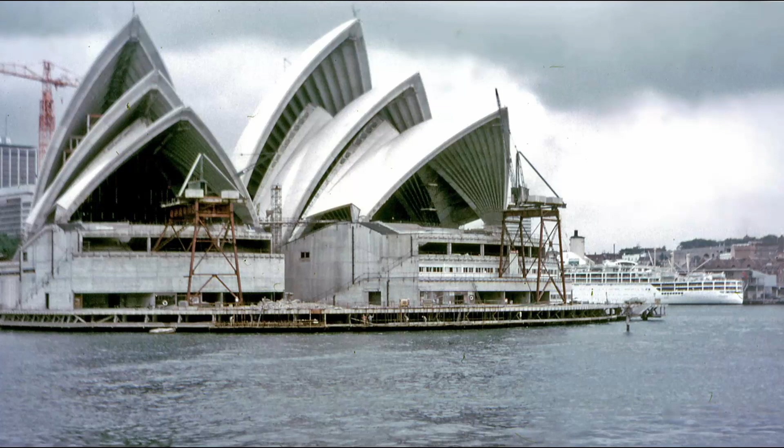In this series of videos, I'll be walking you through the entire process for completing a development in this state, from concept stage to completion, and clearing up some of the confusion that can seep in along the way. I've been in this job for a few years now, and there are a few things you should understand up front when you want to build something in this state.

Whether it's a house, a shed, or a pool, the first is cost. What a lot of people don't realise is there are actually quite large sunk costs in building before you even think about getting excavators in. Depending on if you're building in a new subdivision or not, you might have to pay for things like geotech reports, site surveys, flora and fauna reports, heritage reports, and bushfire assessments. The reason I mention new subdivisions is because these reports have typically already been done for the whole area, so you might be able to piggyback off those.

The second is when you see properties advertised by real estate agents as dual occupancy potential or room to add a granny flat, you'll almost always notice the letters STCA right after it. That stands for subject to council approval, which essentially means the real estate agents could be just lying through their teeth and they can get away with it because they're not actually promising you that it will work. Basically, if a real estate agent tells you about possible development options on a site, take it with a huge grain of salt because they probably just want the sale.

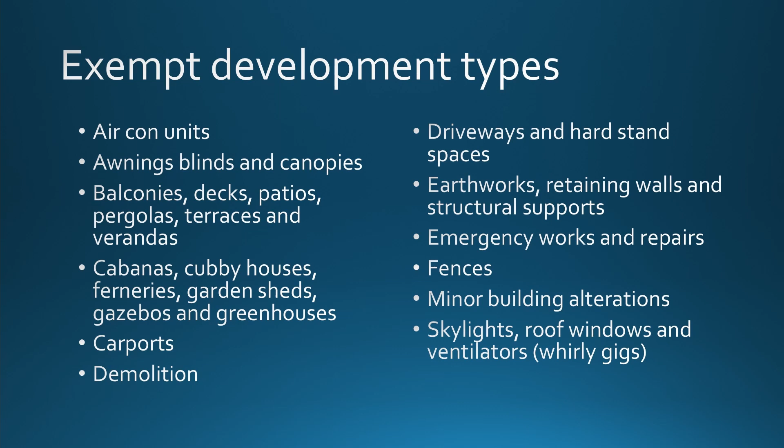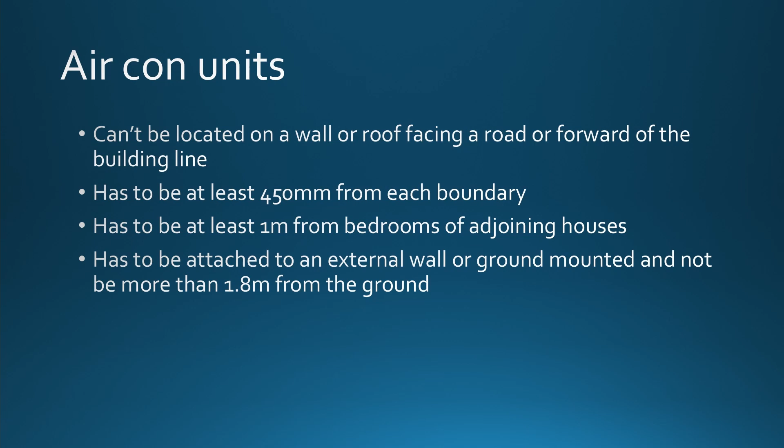Okay, so let's start with aircon units. Basically with these, you can't build them forward of your front wall or facing the main road. They have to be at least 450mm off each fence, and they're supposed to be a metre from bedrooms in adjoining houses. I've never seen that one really checked before, but it is something that's in the requirements.

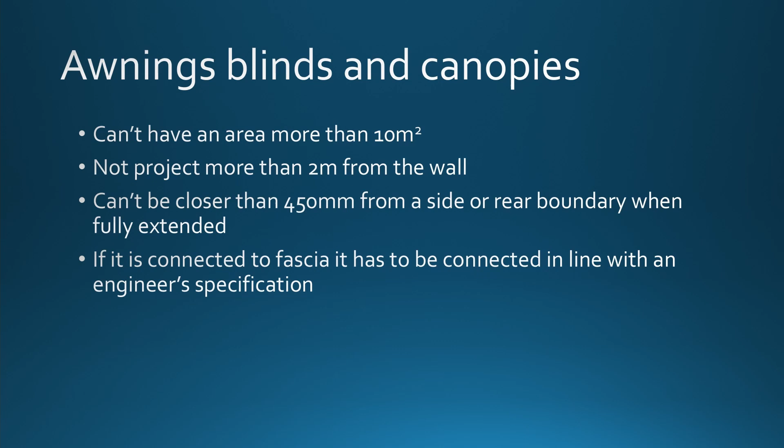For awnings, blinds, and canopies, they can't have an area more than 10 square metres, can't be more than 2 metres off the wall, can't be closer than 450mm from a side or rear boundary, and if you connect it to the fascia of the building, it has to be engineered. You'll find with most of the things in this that they say it can't be closer than either 900mm or 450mm. That's really standard for most development.

So balconies, decks, patios, pergolas, terraces, and verandas. These are going to get asked about a lot, and you can't have more than one being 25 metres squared, and the total of all of these types of things can't be more than the numbers right there.

And you also have to be careful when you're building these so that there aren't any walls around that are higher than 1.4 metres, because if there are, then it's classified as a room and not as a balcony or a deck.

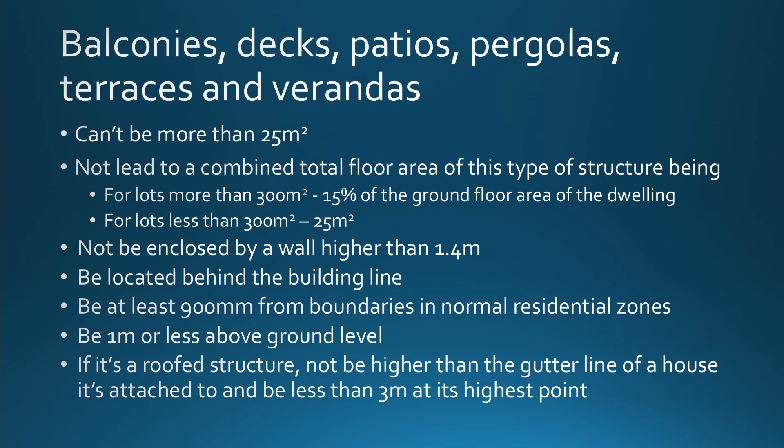The only other real things to keep in mind with this is that they can't be more than a metre above ground level, which is pretty important. That gets checked. And it also can't be more than 3 metres, or if it's attached to the side of your house, can't be higher than the gutter line of the house.

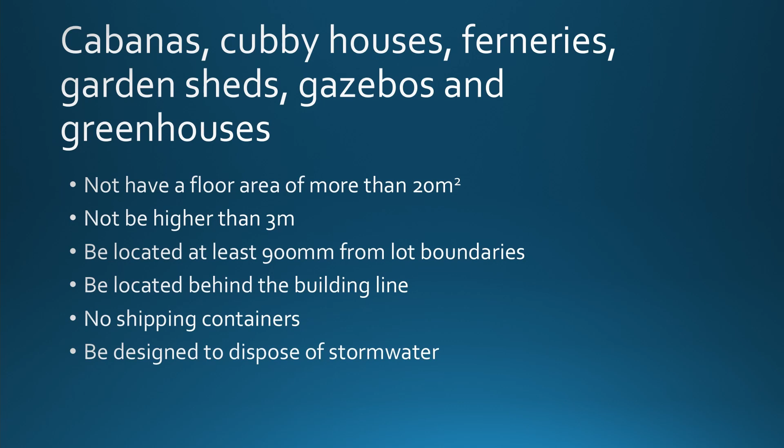So for cabanas, cubby houses, ferneries, garden sheds, gazebos, and greenhouses, can't have an area of more than 20 square metres, can't be more than 3 metres high, have to be at least 900mm from the boundaries, and really importantly, they can't be shipping containers. There's a lot of people who try and use the small shipping containers as garden sheds, and you're just not allowed to do that.

For carports, they can't have a floor area more than 25 square metres if the lot area is more than 300 square metres. If it's less than 300 square metres, you're only allowed 20 square metres.

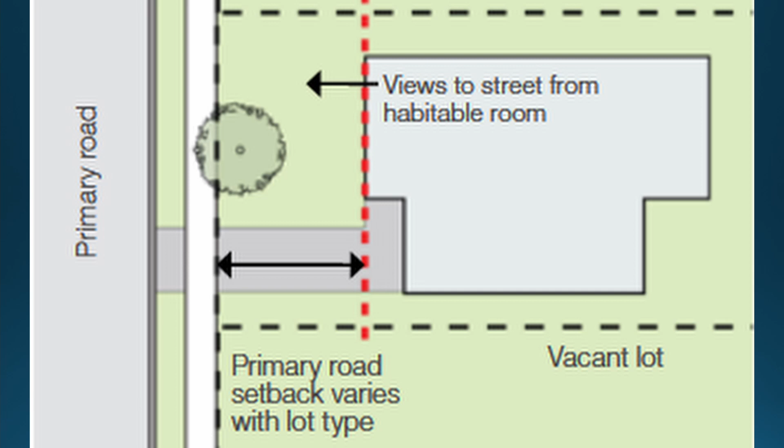You've got the same rule about the height, and if it's attached to the house, it has to be lower than the gutter line. It has to be a meter behind the building line. The building line is defined, for this context, as the line where the front of your house is - so the front wall of the first room of your house, that's where the building line is.

Demolition - I get asked about this one quite a bit. For demolition and exempt development, basically it allows you to demolish anything that you would be able to have approved by exempt development. So for any of the things we're talking about here, you're allowed to take them down without approval as well.

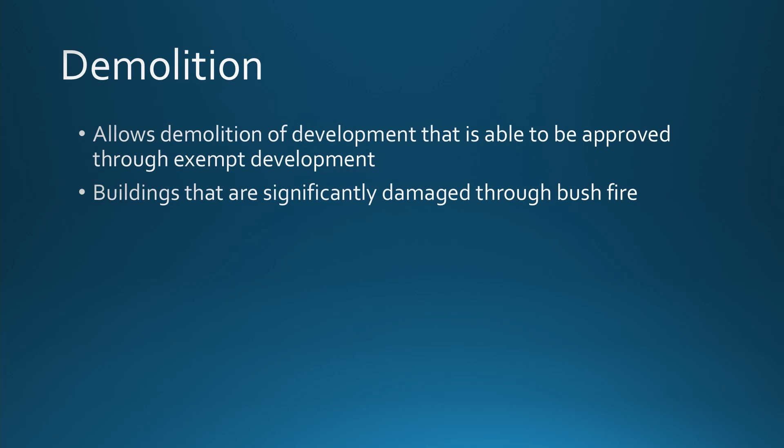Another big one is driveways and hardstand spaces. This one is a bit more in depth because there are quite a few rules around it. It has to be designed so the stormwater runoff goes into the normal stormwater system and doesn't just flow into your neighbour's yard. It has to be built in accordance with the Australian standard. And if it's ancillary to a dwelling, meaning attached to a house, it can't have cut or fill more than 600mm.

And if it's not attached to a house, it can't have cut or fill more than a meter. For driveways, you can't have them any wider than the hardstand space, carport, or garage that it's connected to. And if you're putting in a new crossover over the verge and onto the road, you have to get approval from council before you do that.

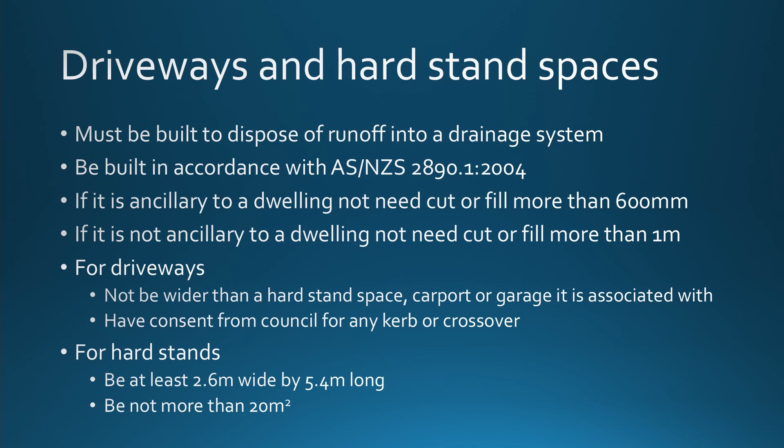For hardstand spaces, they have to be a minimum of 2.6 wide and 5.4 meters long, and not more than 20 square meters. And if it's attached to a house, it has to be at least 1 meter behind the building line, and at least 900mm from each side or rear boundary.

Now this area part is really important. For all of your driveways, hardstand spaces, pathways, and paved areas - so all concreted or paved areas - can't be more than 15% of the lot area, or 150 square meters, whichever's less. You'll have to calculate that out for your own yard and lot, then work out which one of those is less, and that's the maximum you're allowed.

There's still some landscaping requirements. In your front yard, if the lot is less than 18 meters wide, you have to have at least a quarter of that area in front of your building line landscaped. And if it's more than 18 meters, you have to have at least half.

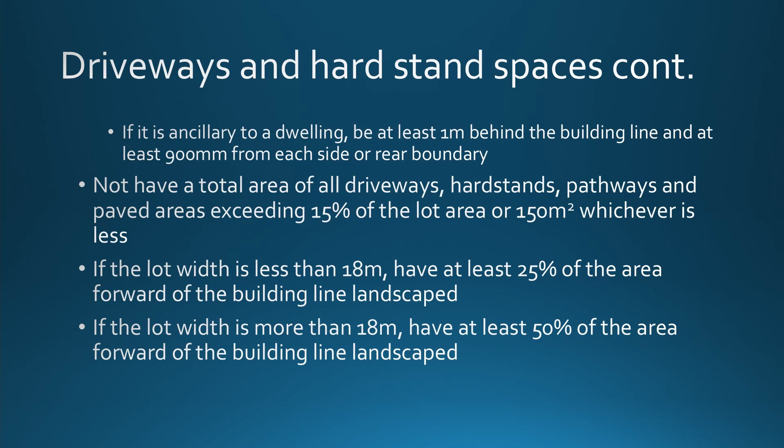Now for earthworks, retaining walls, and structural supports, you can't have cut or fill more than 600mm. It has to be at least a meter from each boundary, and at least 40 meters from a natural watercourse. So if you've got a river nearby, or you're on a larger block with a canal or something running through it, you potentially won't be able to do it as exempt development, and you'd have to get approval.

You can't have any of your earthworks or retaining walls redirect surface water flow. So if you had overland flow paths already put in when your house was built, you can't alter that by putting something like this in. If you are going to fill more than 150mm deep, it can't be more than 20% of the lot area - you can't just completely re-level your whole block, it can only be 20%.

For retaining walls, they can't be more than 600mm. They have to be separated from other retaining walls and structural supports by at least 2 meters. It has to be at least a metre from easements, sewers, and water mains, which you can check by going onto the Sydney Water Building Plan Approval website and doing a search. It'll cost you a few dollars, but you should do one anyway when you're going to build something. I'll go over that in more detail in a later video.

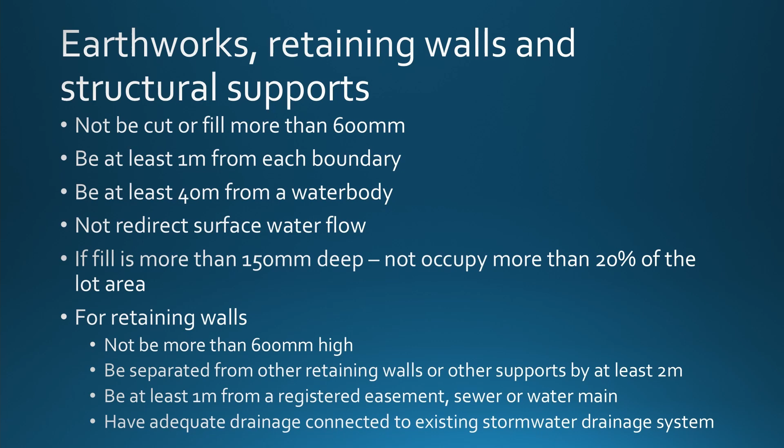Now, emergency works and repairs - this one is really, really misunderstood. A lot of people think that if something just starts falling down on their block, they're allowed to rebuild it, take it down, or do something else. It's actually not quite true. You can actually only do emergency works where the government has made a declaration that there's a state of emergency in that area - like flooding, bushfires, or in Queensland, a cyclone. Normally, you can't actually use this provision.

However, if you are going to use it, it has to be done within 2 years of the declaration. You can't change the configuration or size of whatever you're rebuilding.

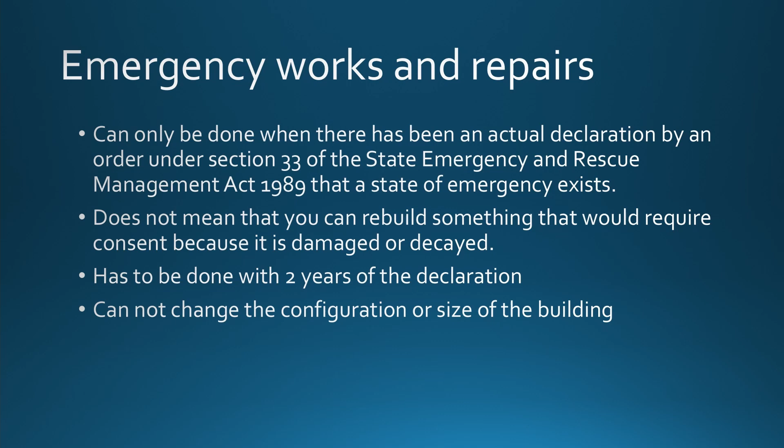Fences are a bit tricky because they're governed by both this set of rules and also the Dividing Fences Act. The Dividing Fences Act has more information about who pays for fences and how you organise that with your neighbours and all that kind of business.

This has more of the rules about what the fence actually has to look like. For your side boundary fences, they can't be more than 1.8 high, and if they're masonry, they can't be more than 1.2 high. Can't have any gates that open outwards, they have to either be internal gates or sliding gates. If they're metal, they can't be shiny, you've got to have low reflectivity.

And if you're going to be putting a fence on your front boundary, it can't be more than 1.2 meters high, and it has to be open for at least 20% of the area that's more than 400 mil off the ground. Above that 400 mil, you can't have any solid piece that's more than 350 mil.

It's a little confusing, but if you think about it, a lot of those fences you see around the place that have bricks up to your shin, then little brick pylons with aluminium or metal strips in between - that's what this is for.

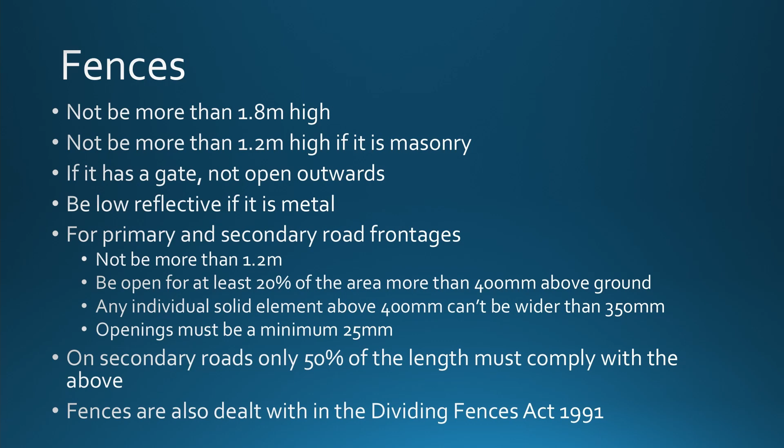And on a secondary road, so if you've got a corner block, your secondary road which isn't the one the front of your house faces, only 50% of that has to comply with the maximum 1.2. Otherwise, the rest of it is allowed to be the 1.8 high normal fence.

But really critically, you're not allowed to change the configuration of a room. So you're not allowed to put a wall up, take a wall out, do anything like that. And you're also not allowed to rearrange where the things are in your bathroom. So you're allowed to pull out your toilet, put a new toilet in, but it has to be in the same place. If you change the layout of it, then this doesn't apply.

They also go into a bit of detail about if you're replacing or renovating deteriorated door frames - it has to be made of equivalent or improved materials. So basically, if it's decayed, you can't just do a really shoddy job, it has to actually be decent.

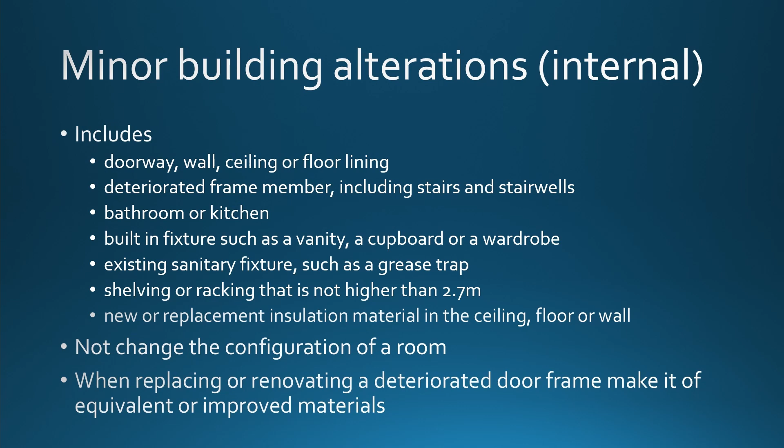You are also not allowed to reduce window sizes, not allowed to change the size of doorways. You can't enclose an open area, so if you have a balcony or a patio or something like that, you're not allowed to put walls up that would then make that into a room.

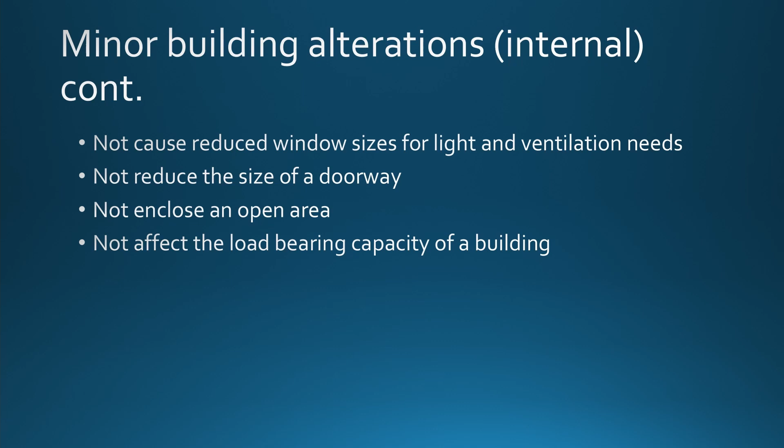And you're also not allowed to affect the load bearing capacity of a building. So you're not allowed to take out structural beams or things like that, or put in something that would be really, really heavy in a small area that could potentially be a problem for the building.

For external building alterations, you're allowed to do all of these things. Give you a second to read that.

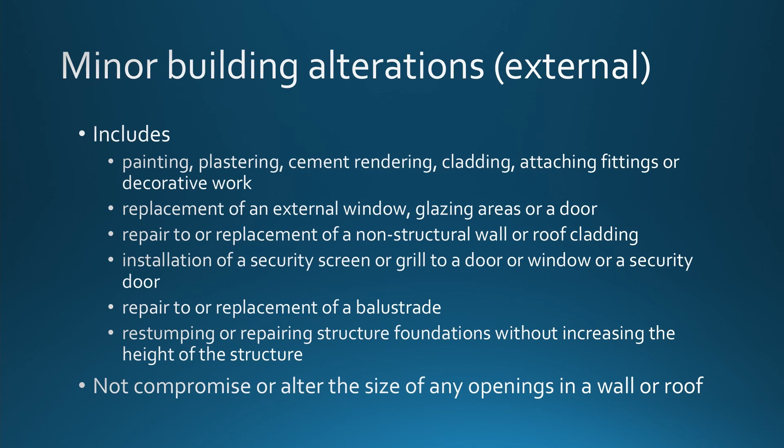Most of these are pretty similar to the interior ones, just painting and things like that, a bit of installation and repair. So basically, the only other things to keep in mind is that you're not allowed to change the size or do anything to any of the openings in a wall or a roof, so any doors, windows, things like that, they all have to stay the same.

And if you're recladding your house or want to attach fittings and decorative things, you can't do it on buildings that are more than 2 stories, and it can't use combustible cladding.

The only other thing to keep in mind is that you can't change any emergency exit paths from a building. So if there are specific fire requirements for your house and your block, you can't change anything that would affect it.

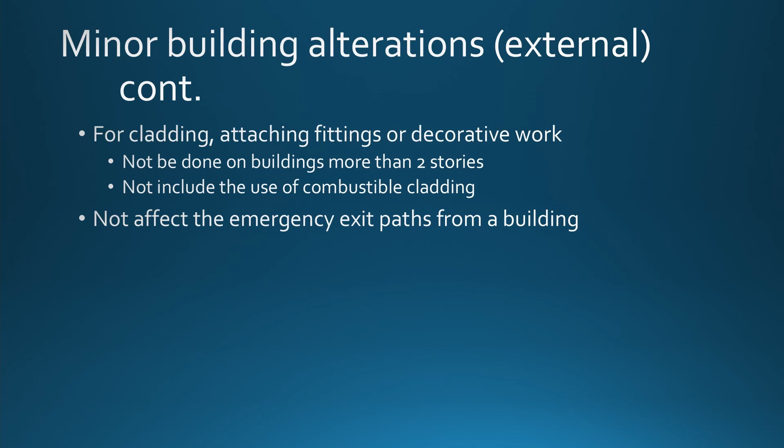All of these have stipulations about if you're doing the work in an area that's bushfire prone. You'll really have to read each one yourself for the specifics, but some of them just aren't allowed, full stop, and others there are just requirements for not reducing the level of bushfire protection.

For skylights, roof windows, and ventilators, which are whirligigs, the little things that spin around, you can't have more than 2% of your roof area taken up by these. They have to be at least 900 mil from each boundary.

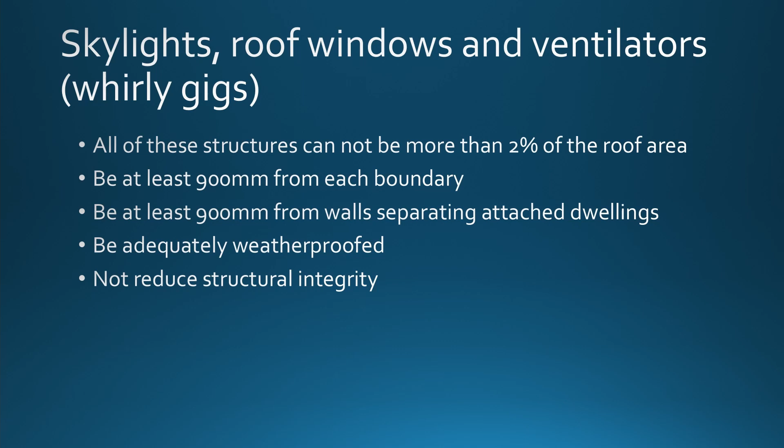And if you've got a dual occ, so a house on either side of the wall with the separating wall down the middle, it has to be at least 900 mil away from where that separation is. They have to be properly weatherproofed, and they can't reduce the structural integrity, which is pretty normal.